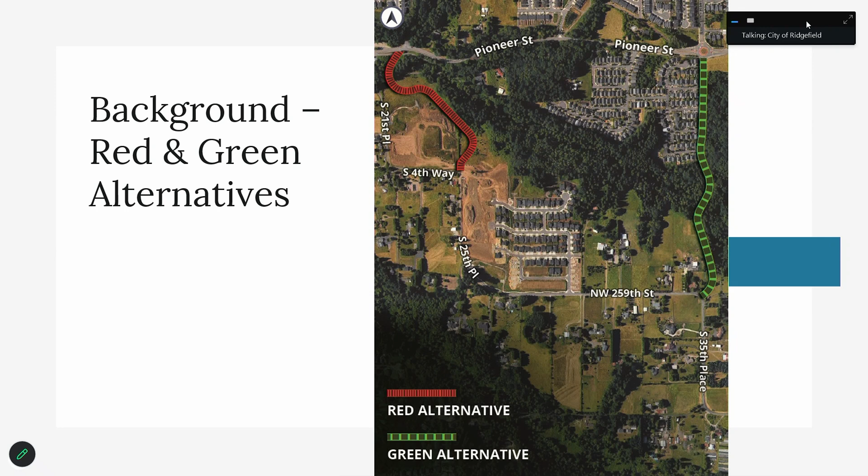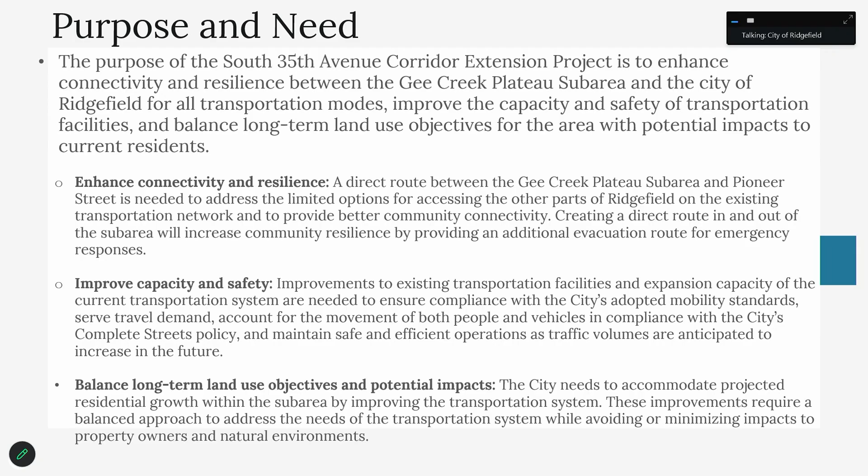So community engagement, as I mentioned, we've been having a lot of community conversations and stakeholder conversations over the last few months. We also took into account all of the community engagement that happened to get us to this point, which started with the sub-area plan process when this roadway extension was first identified as being needed as the area developed.

Then there were the neighborhood and public meetings that happened as part of that prior alternatives analysis process where you were looking at the 5 alignments. As you narrowed it down to these two, that's where we took over, and conducted the stakeholder interviews. Instead of just individual one-on-one interviews, we wanted to reach as many people as possible in that kind of setting as well.

We had some individual interviews with property owners who are potentially the most impacted by one of the alternatives. Beyond that, we had more of a group interview for the different neighborhoods, speaking to around 40 community members through that process. We also had a community open house where we invited the entire Ridgefield community to attend, and about 30 community members attended. It still felt like it was primarily the neighbors involved, but it was open and advertised more broadly.

After the in-person open house, we had online engagement too. We wanted to provide additional opportunity for comment if people were not able to make it to that in-person event. So we put the materials on Ridgefield Roundtable and had about a 2-week period where we were collecting comments via email and Facebook comments, and responding to those too.

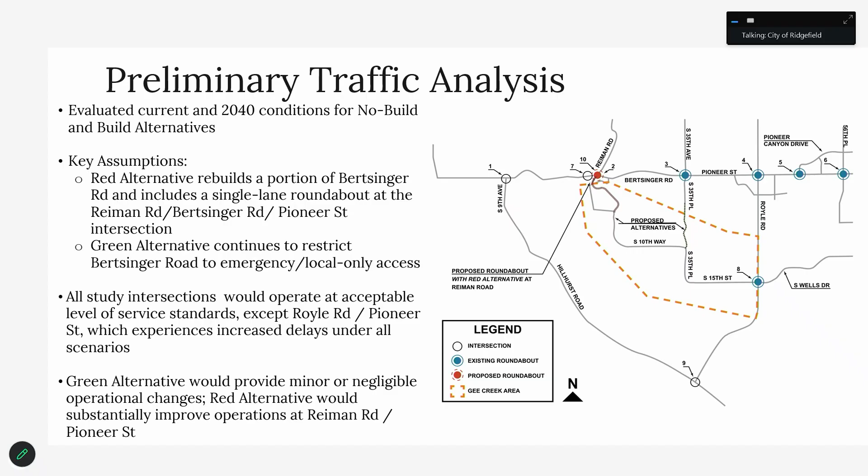The green alternative would have minor to negligible operational changes overall to the other intersections - you're just not seeing much difference outside of the sub-area. With the red alternative, you would see pretty substantial improvements at Reiman and Pioneer. So that is the one location where there is a real difference in the two alternatives, because of that roundabout intersection improvement occurring there. Next slide.

With the proposed red alternative, again, you would see a projected reduction in crashes at the Reiman and Pioneer intersection from 7 to 2. So some improvement there.

And then within the sub-area itself, while none of the study intersections were within the sub-area, we did look at traffic within the study area and how the different alternatives could impact that existing circulation. You would see some improvement in traffic conditions from those eastbound trips currently taking 10th Way that would then divert and use the red alternative.

But the green alternative would serve a larger portion of the Gee Creek Plateau and would better serve the future potential development of that area as well. So as the traffic analysis said, really a combination, you get the best benefit from a traffic standpoint with a combination of the red and green alternative.

Again, there's not a clear winner from a traffic analysis standpoint with either of them by themselves. They both help improve conditions in the area and have minimal impacts outside, with the exception of that one intersection.

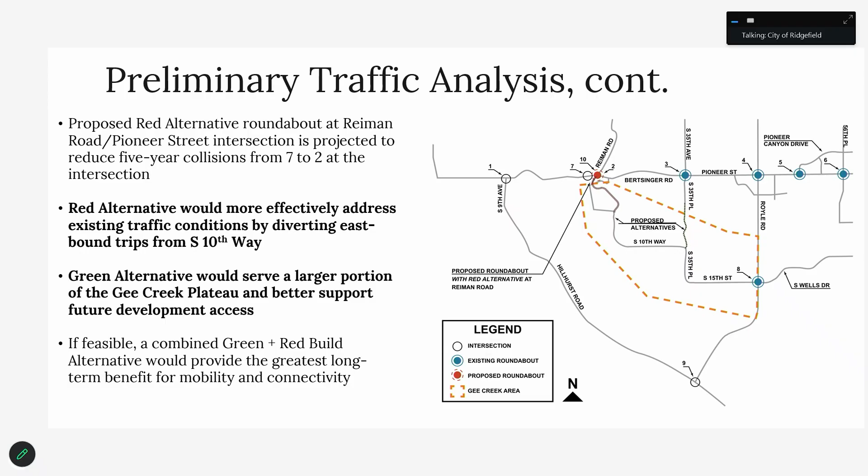Any other questions? Okay, next slide. So looking at land use and parks, as John just mentioned, the red alternative is within the city.

The green alternative has segments that are outside of the city, so the zoning and land use are different. It is anticipated that area would be annexed, and there would be future development that would occur along the green alternative as well. You do see more conversion, and this doesn't have the specific number, so I may have to get back to you on that.

I know it's in our report, I just can't recall it off the top of my head. But there is less conversion of residential land to right-of-way with the red alternative than with the green alternative.

And then there are some improvements to access to trails, but one thing Miranda and I were just talking about before this meeting, the brand new trail at Ridgefield Heights is not being fully shown on this map, so we need to show that because there would be some impacts to that trail.

We thought we had gotten the location on here, and then it's not fully on there.

I think the new trail would intersect with the red alternative in maybe a couple of places, the way it kind of does switchbacks. So we need to get that on here and update this analysis to show that there would be impacts to that trail, and you would have to do trail crossings and things like that to mitigate for that potential impact in the future. The green alternative has no direct impact to a trail like that. So that's something that is different between the two.

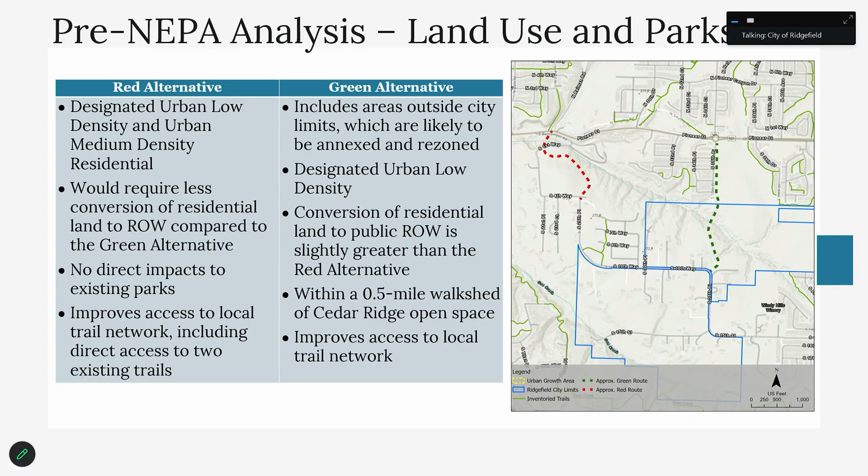Just to the east of 35th, right adjacent to Pioneer, south of Pioneer, that is a large property that may develop in the future, but I don't think there's any residents on that property now. So that wouldn't have been considered a residential property to be impacted because there's no house that exists there today. We tried getting it for a park, but it didn't happen.

It might be an interesting piece of the NEPA analysis we can consider: the future development potential in the area and impacts to the future development that is in the area. Because those big huge properties that are parcelized but are still large, they do have zoning associated with them, and at least 2 of them are in for annexation right now. So we can certainly look at potential property impacts in that future scope. Obviously, as they develop, there would be alignment between this project and the development application, which also looks at impacts. So I don't know exactly how we would tackle it, but understanding your point.

The alignment may go through some of those properties that are in for annexation off of 35th. Certainly that is possible. It may not be the straight line, because like we said, it's just a line drawn in the sand now.

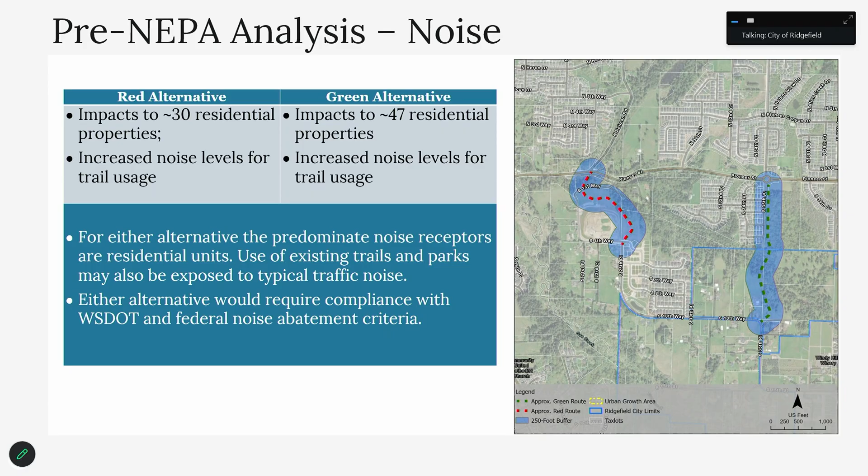Wetlands and waters: there's a little more potential wetland mitigation required with the red alternative versus the green alternative. Both have some impacts to wetlands. We didn't do a wetland delineation as part of this—that would come from the locally preferred alternative—but prior studies have identified category 2 and 3 wetlands near the red alternative, which typically require a 100-foot buffer under Ridgefield's code. With the green alternative, there's less delineation of wetlands that has existed, so we're less sure about the actual category of potential wetlands, but there are potential wetlands in the vicinity as well. We'd anticipate impacts and mitigation with either, slightly more with the red alternative.

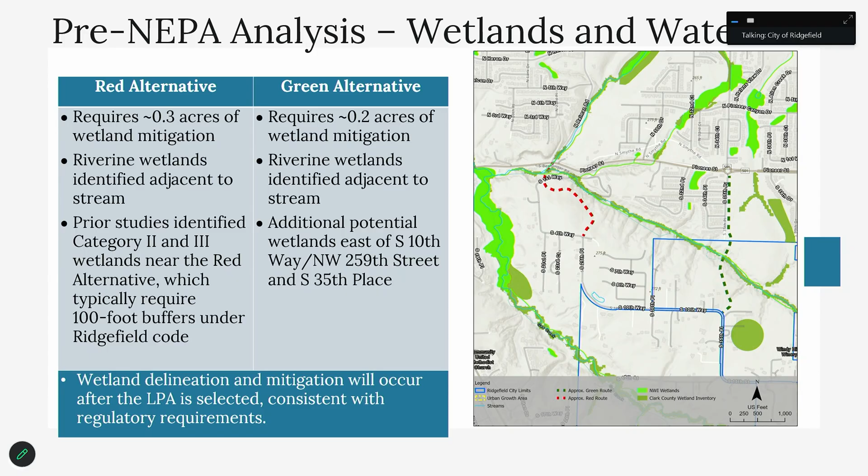Habitat: along with wetlands and environmental areas, we're seeing potential impacts to habitat conditions. There are two priority bat species in the area that could be impacted by either alternative. There's some mature forest area in the green alternative, and slightly more potential habitat impacts with the red alternative due to oak woodland mature forest area, plus some potential impacts to steelhead and coho salmon, a threatened species, because there's a floodway with the red alternative that would be impacted. We didn't do field work or an on-the-ground habitat assessment as part of this desktop review—that would come after the locally preferred alternative is selected.

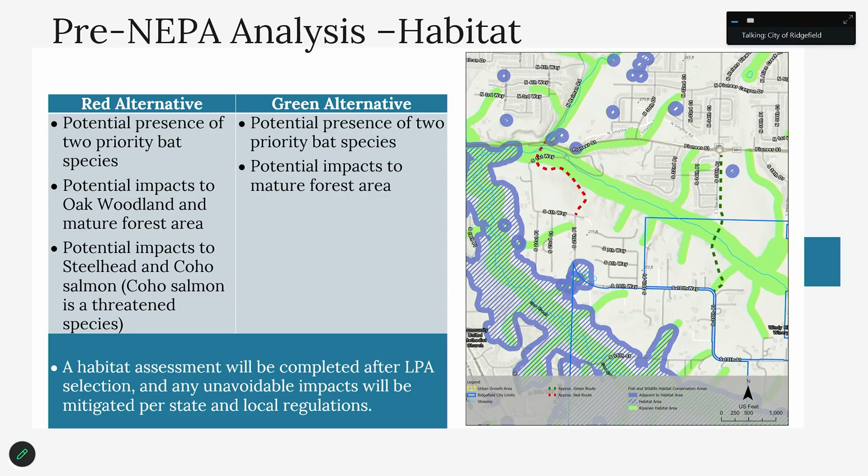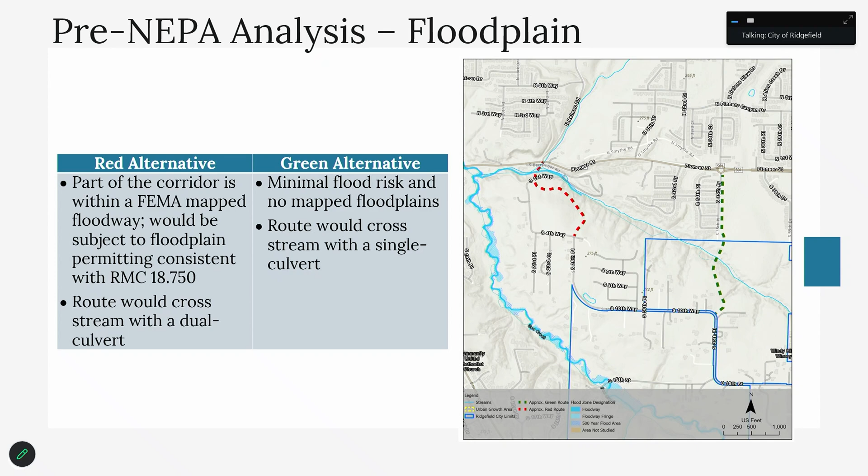This is the floodplain impacts. There's a FEMA mapped floodway as part of the red alternative that would be impacted and would require consistency with floodplain permitting, and would likely require a larger culvert to cross that stream. There's minimal flood impact and no mapped floodplains as part of the green alternative, though still some stream crossing and a single culvert that would need to exist.

Geotechnical conditions: for this preliminary analysis, we looked at geotechnical reports that have been done in the area and assessed those. They're largely finding the same things red to green, but there are additional steeper slopes that would likely require more retaining walls in the red alternative than the green alternative. The more perpendicular approach to steep slopes in the green alternative allows for a less risky build and better stability, whereas the red alternative is a riskier construction and build condition.

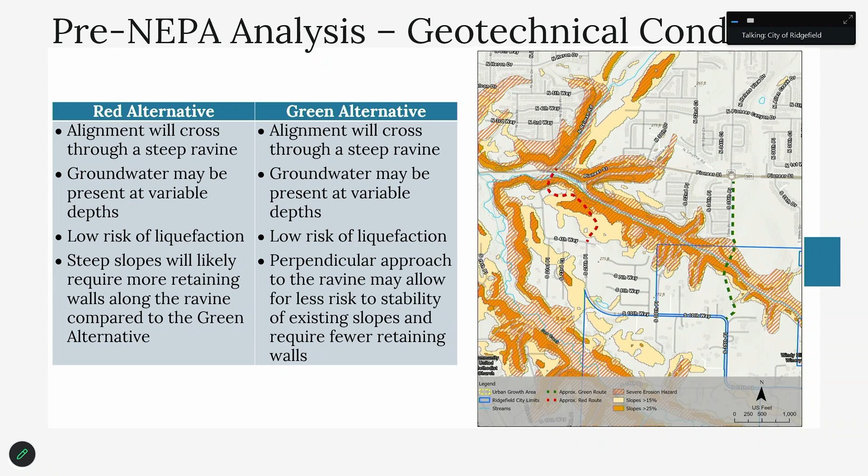Cultural resources: in both situations, largely the same from an archaeological resources standpoint—moderate to high probability based on county mapping. There's potentially one eligible property in the red alternative that could be impacted. After a locally preferred alternative is selected, we'd go through the NEPA Section 106 process, a more stringent review of cultural and historic properties, and record those with the Department of Archaeology and Historic Preservation. This is a big part of the NEPA process—doing this assessment and consultation.

Utilities: there's a planned sewer pump station near the Ridgefield Heights area that would be potentially impacted by the red alternative. There's no known sewer conflicts with the green alternative. We've been coordinating with Clark Regional through this process, so they're aware of that, and we'll continue to do that with either alternative, making sure impacts are identified early and adjustments can be made.

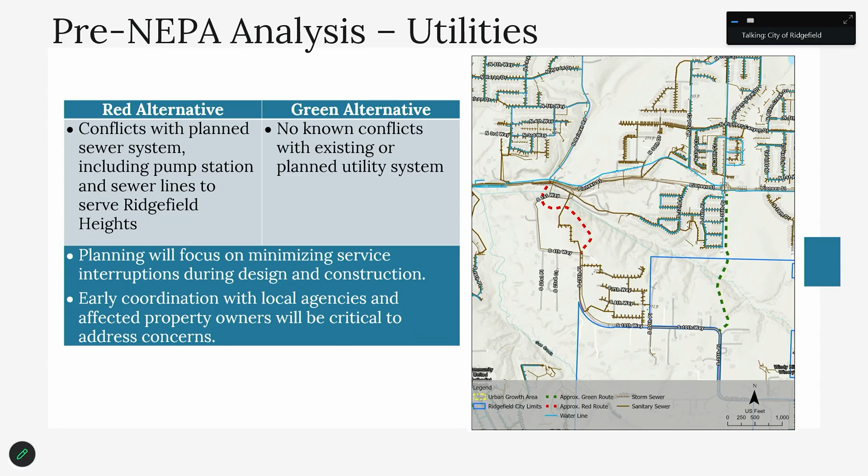Now getting to the purpose and need—this is an important part of assessing the two alternatives to meet the criteria for a locally preferred alternative from a NEPA standpoint. Broadly, both alternatives meet the purpose and need, though there are some nuances to each. The red and green alternatives would both provide new roadways that could improve conditions and complete streets connectivity.

There are some benefits from a traffic standpoint for the red alternative and that new roundabout, which would help operations, part of the purpose and need. But the green alternative still maintains safe and efficient operations overall—you're not seeing reduction in level of service with the green alternative. Both would support long-term growth. You are seeing more impacts to critical areas with the red alternative, and balancing transportation improvements with environmental conditions is part of the purpose and need, so there's a little more impact to environmental areas with the red alternative.